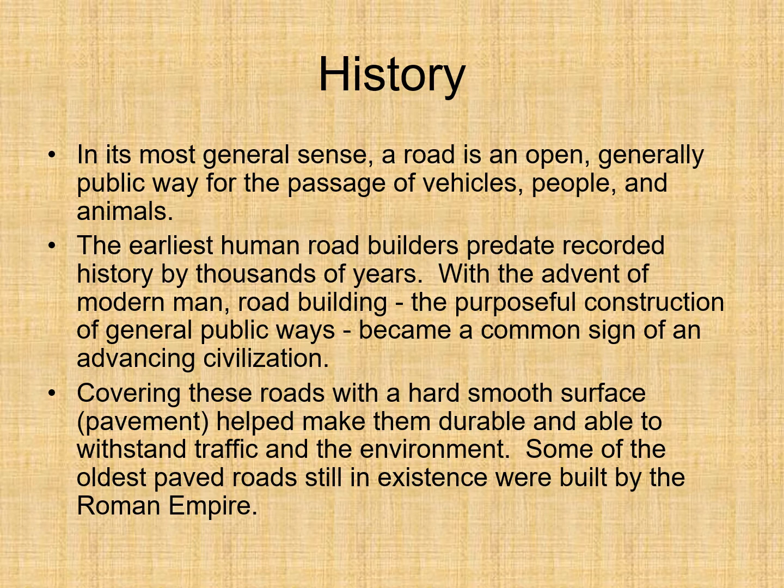So look at the Roman roads. This is the Roman road.

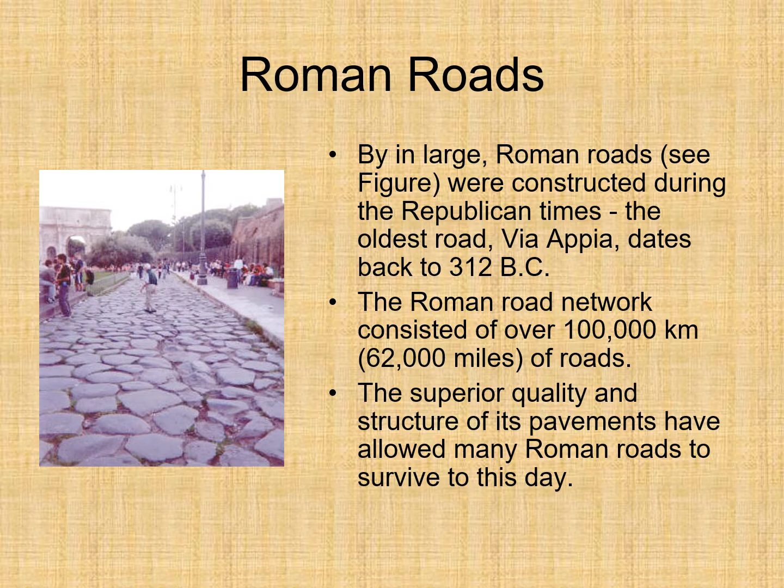By and large, Roman roads were constructed during the Republican times. The oldest road, Via Appia, dates back to 312 BC, before Christ. The Roman road network consisted of over 100,000 kilometers, or 62,000 miles, of roads. The superior quality and structure of its pavement have allowed many Roman roads to survive to this day.

So the topmost layer, that is the summa crusta, that is the surfacing, smooth polygonal blocks embedded in the underlying layer. Nucleus, a kind of base layer composed of gravel and sand with lime or cement.

Rudus, the third layer, was composed of rubble masonry and smaller stones also set in the lime mortar. Statumen, two or three courses of flat rubble stones set in lime mortar.

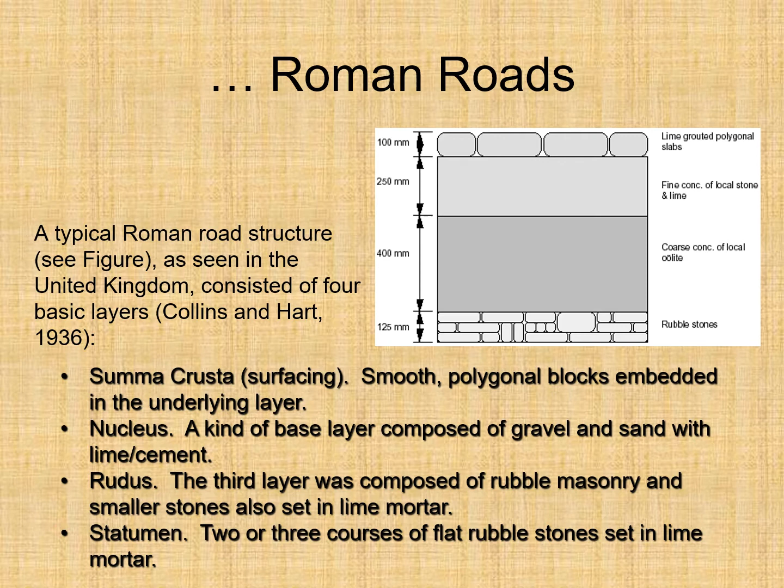Telford Pavements. The first insight into today's modern pavements can be seen in the pavements of Thomas Telford.

Telford served as a building mason and extended his masonry knowledge to bridge building. During lean times, he carved gravestones and other ornamental work. Eventually, Telford became the surveyor of public works for the county of Shropshire, thus turning his attention more to roads.

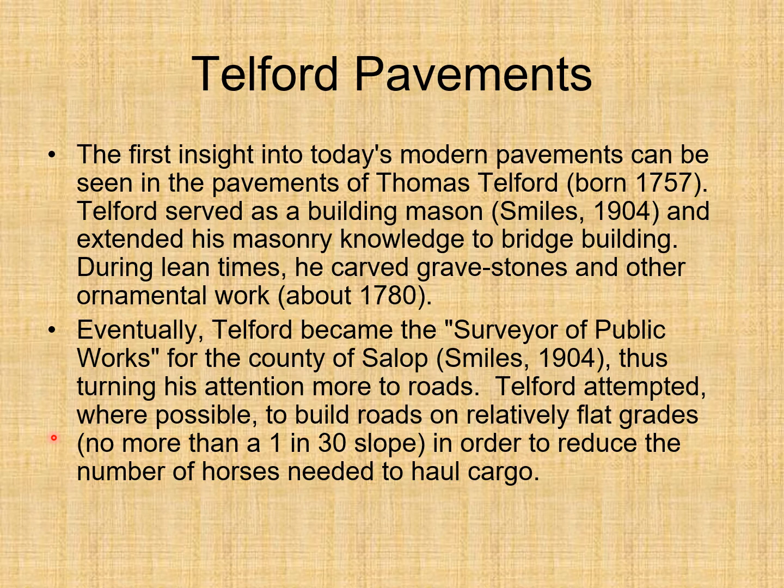Telford attempted, where possible, to build roads on relatively flat grades, no more than a 1 in 30 slope, in order to reduce the number of horses needed to haul cargo.

Telford's pavement section was about 350 to 450 mm, or 14 to 18 inches, in depth and generally specified 3 layers. The bottom layer was comprised of large stones, 100 mm or 4 inches wide and 75 to 180 mm, 3 to 7 inches, in depth.

It is this specific layer which makes the Telford design unique. On top of this were placed 2 layers of stones of 65 mm, or 2.5 inches, maximum size, about 150 to 250 mm, or 6 to 9 inches total thickness, followed by a wearing course of gravel about 40 mm.

1.6 inches thick. It was estimated that this system would support a load corresponding to about 88 Newton per millimeter, or 500 pounds per inch of width.

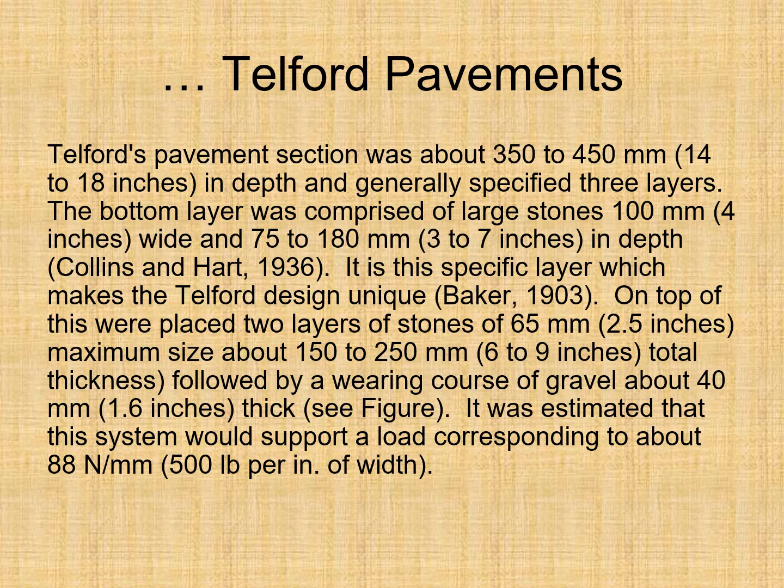So this is the typical cross section of the Telford pavement. These are the different layers that you can see.

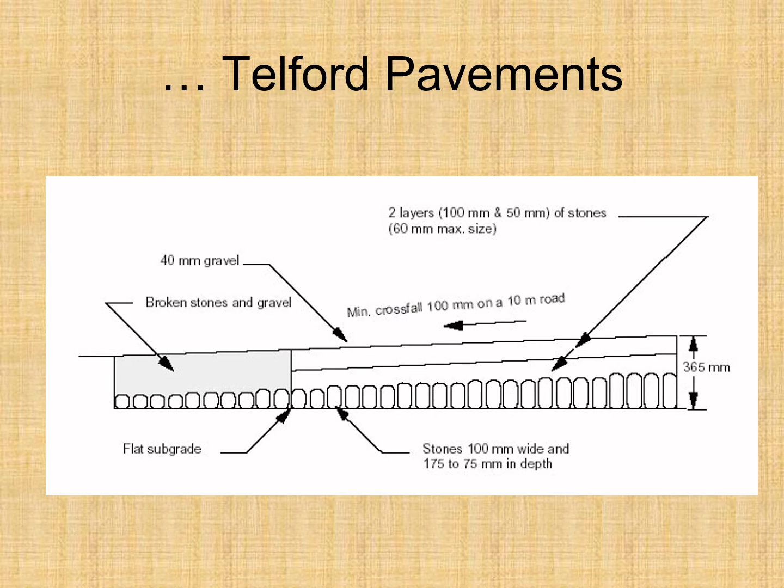Then comes the Macadam pavements. Macadam pavements introduced the use of angular aggregates. John Macadam observed that most of the paved United Kingdom roads in the early 1800s were composed of rounded gravel.

He knew that angular aggregate over a well-compacted subgrade would perform substantially better. He used a sloped subgrade surface to improve drainage, unlike Telford, who used a flat subgrade surface, on which he placed angular aggregate, hand broken with a maximum size of 75 mm or 3 inches, in 2 layers for a total depth of about 200 mm or 8 inches.

On top of this, the wearing course was placed, about 50 mm thick with a maximum aggregate size of 25 mm. Macadam's reason for this 1 inch maximum aggregate size was to provide a smooth ride for wagon wheels.

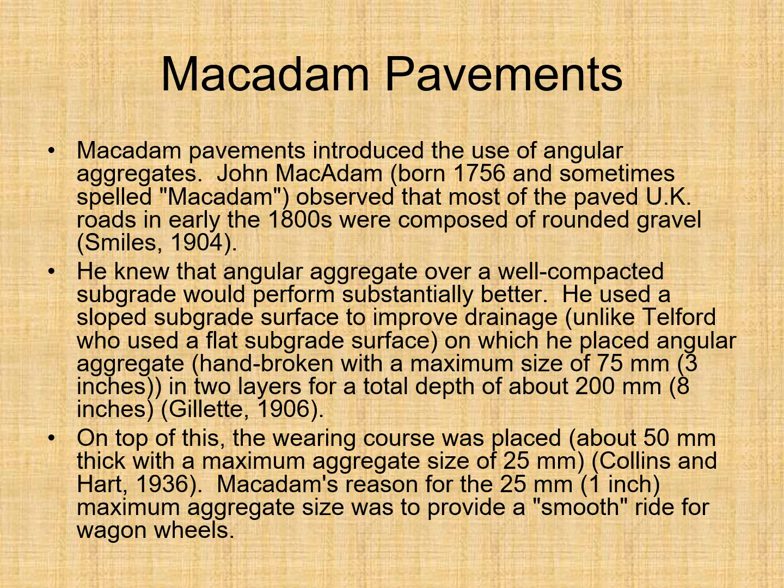The total depth of a typical macadam pavement was about 250 mm, that is 10 inches. Macadam was quoted as saying, 'No stone larger than will enter a man's mouth should go into a road.' The largest permissible load for this type of design has been estimated to be 158 Newton per millimeter, or 900 pounds per inch width.

In 1815, Macadam was appointed Surveyor General of the Bristol roads and was then able to use this design on numerous projects. It proved successful enough that the term macadamized became a term for this type of pavement design and construction. The term macadam is also used to indicate broken stone pavement.

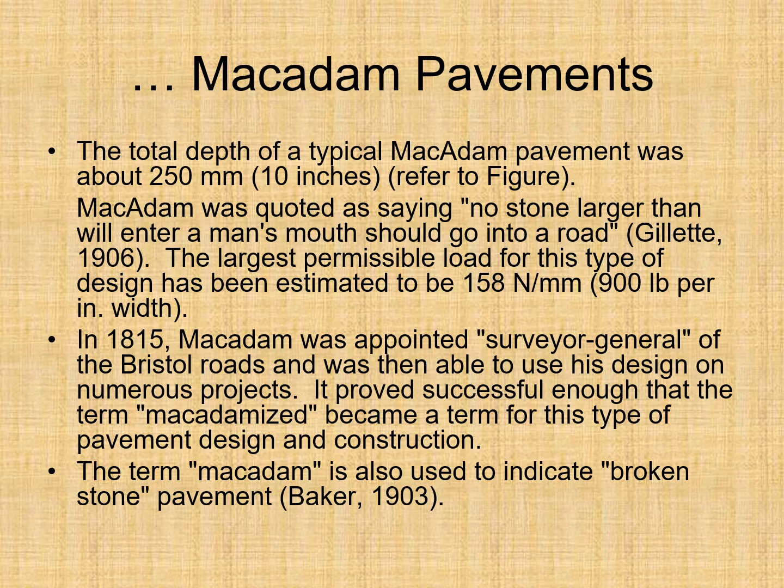So this is the cross section of the macadam pavement.

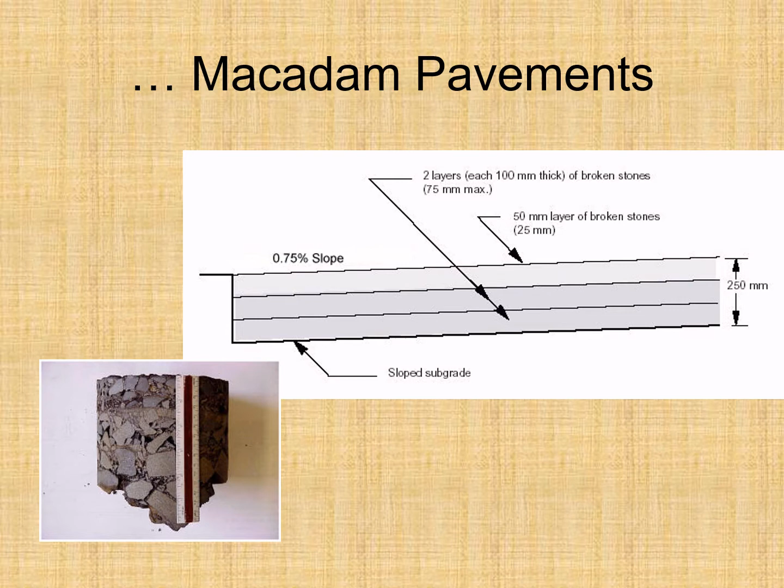Now we are having the modern highways like that.

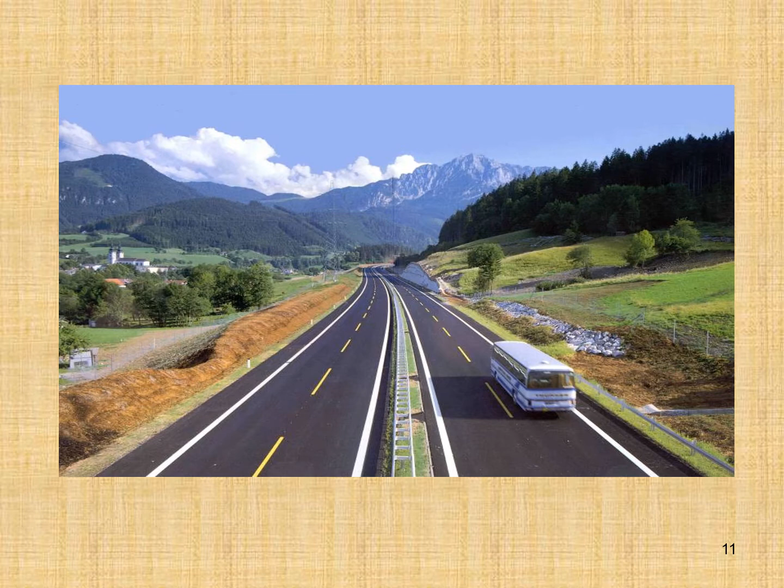Pavement overview. Typically pavements are built for 3 main purposes: load support, smoothness, and drainage. Load support means the pavement material is generally stiffer than the material upon which it is placed, thus it assists the in situ material in resisting loads without excessive deformation or cracking. Smoothness means pavement material can be placed and maintained much smoother than in situ material, which helps improve ride comfort and reduce vehicle operating costs. Drainage means pavement material and geometric design can affect quick and efficient drainage, thus eliminating moisture problems such as mud and ponding puddles.

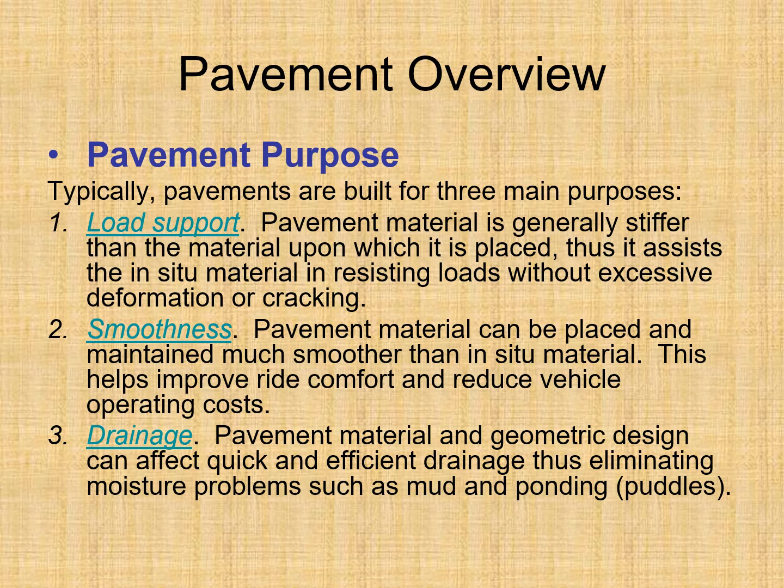So, what is a pavement? The answer is a multi-layer system that distributes the vehicular loads over a larger area. Here you can see the different layers of this road, and this is the wheel that is going to move on that particular road, and in this way we are having the distribution of this wheel load.

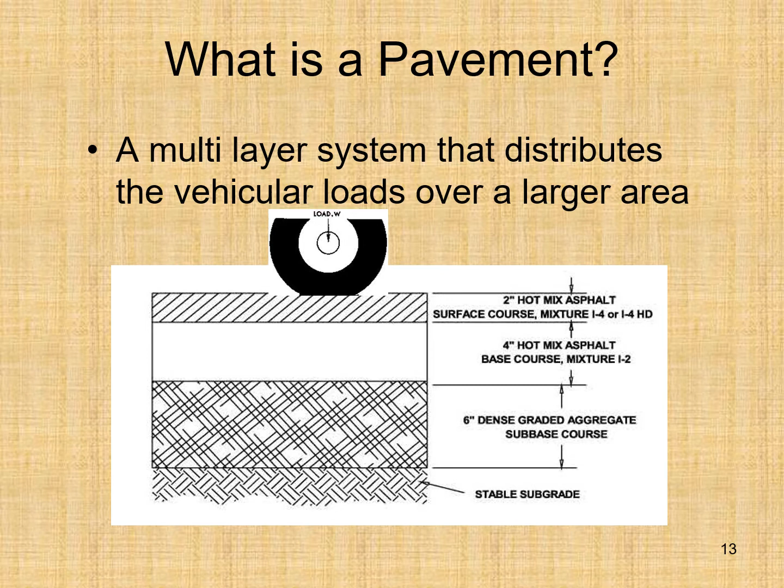Classification of pavements. By function, we have airport pavements, highway and freeway pavements, parking and street pavements. By structure, we have classes like rigid or concrete pavements, flexible pavements or asphalt concrete pavements, composite pavements, and gravel pavements, meaning unpaved pavements. Rigid pavement and flexible pavement we have already discussed, but composite pavement is new, and we will discuss this one in today's lecture.

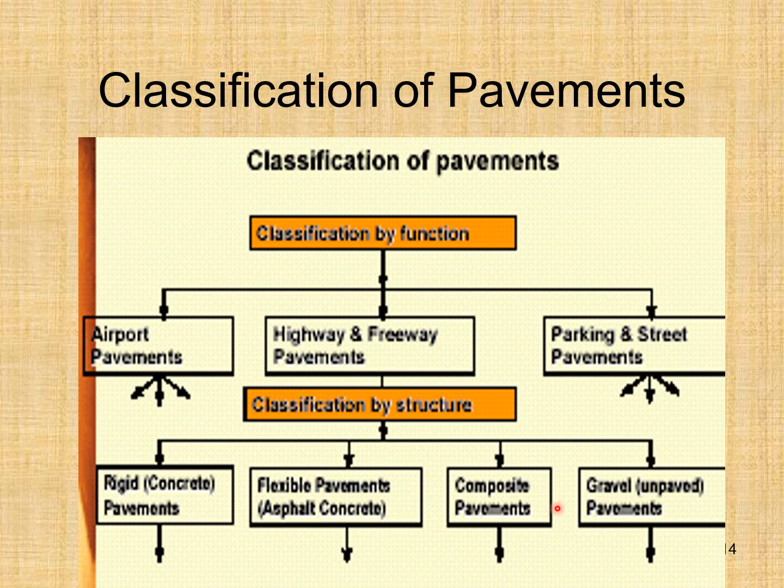Here you can see the flexible pavement and its conventional components. Upon subgrade we are having the subbase, upon that the base course, and this is the surfacing. This one is the binder course or intermediate course, and this is the wearing course. The prime coat of bitumen has been provided in between the binder course and the base course. Where I am moving this pointer, you can see the tack coat, which is provided to develop a bond between the wearing course and the binder course. At the top we have got the seal coat just to seal the surface of the wearing course. So these are the conventional components of flexible pavement shown in this diagram.

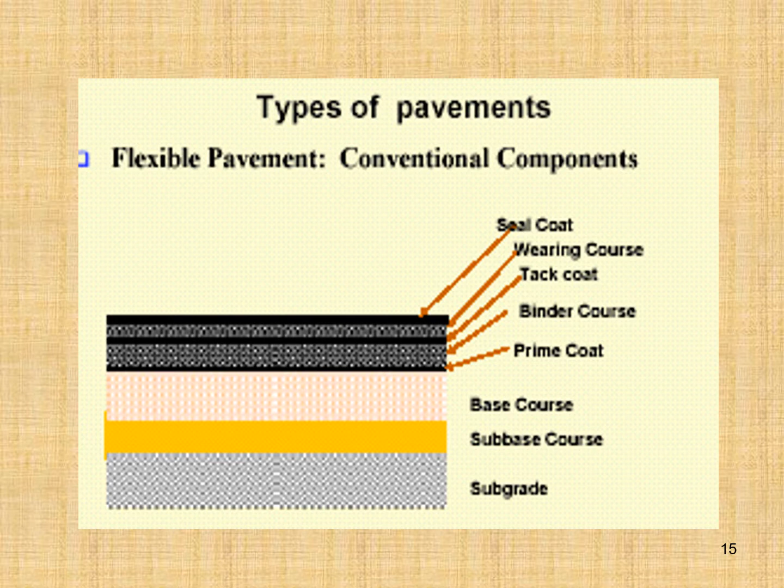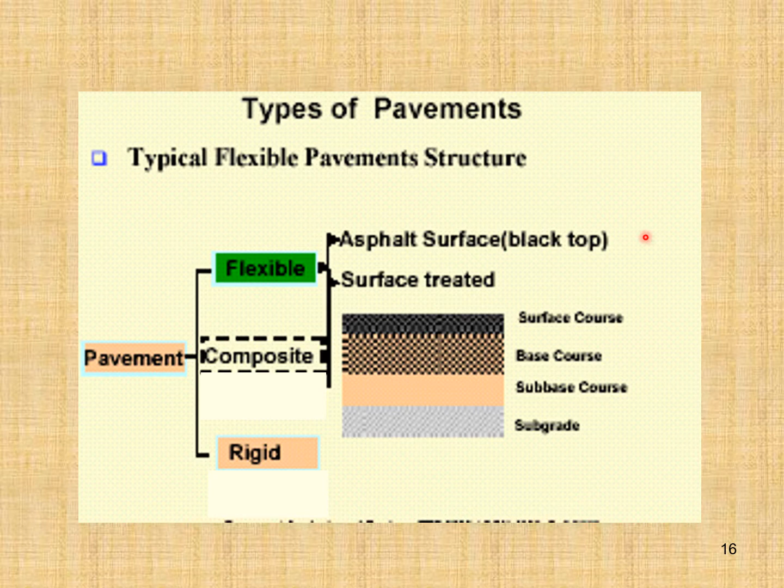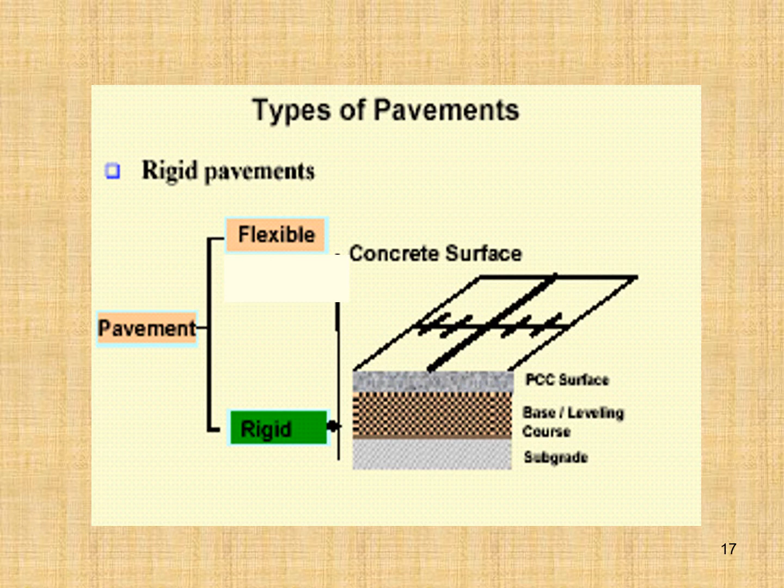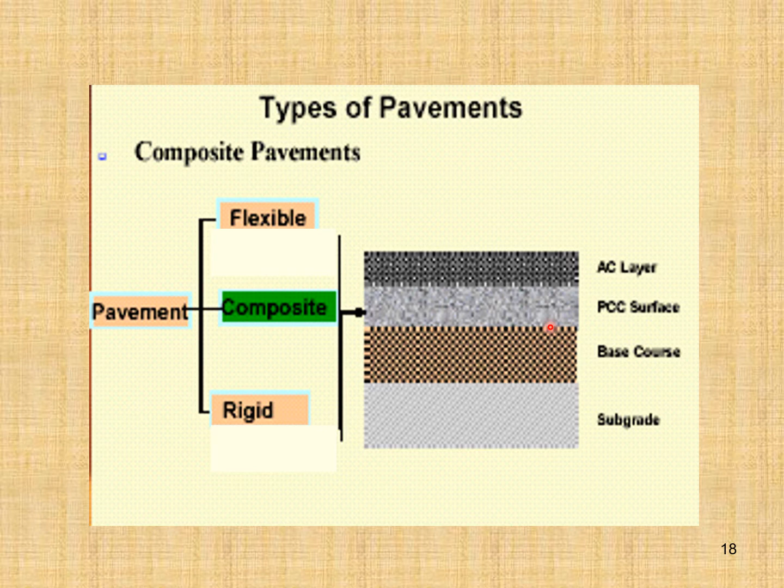And this is a composite pavement. In fact, you can say it is the combination of the flexible and the rigid pavement. In this particular case, you can see subgrade, base course, and the PCC surface. So up till now we are having the rigid pavement, and upon that you can see the asphalt concrete layer has been provided. So this structure is basically the composite pavement structure.

So composite pavements are of two types. Number one, the composite pavement black topping. Here the idea is that we are having the rigid pavement, and upon that we have provided the leveling course, and above the leveling course we have just provided the asphalt concrete overlay. So this is the composite pavement, or simply the black topping pavement, because if you look at the color of asphalt, it is very dark brown to black color, so that's why it is called black topping.

On the other hand, the second type of composite pavement is the white topping. So originally we had the flexible pavement over here. At the top of that we provided the leveling course, and then the PCC overlay has been provided. If you look at the color of the concrete, it is very light, so in that context, the word white is being used, the white topping pavement.

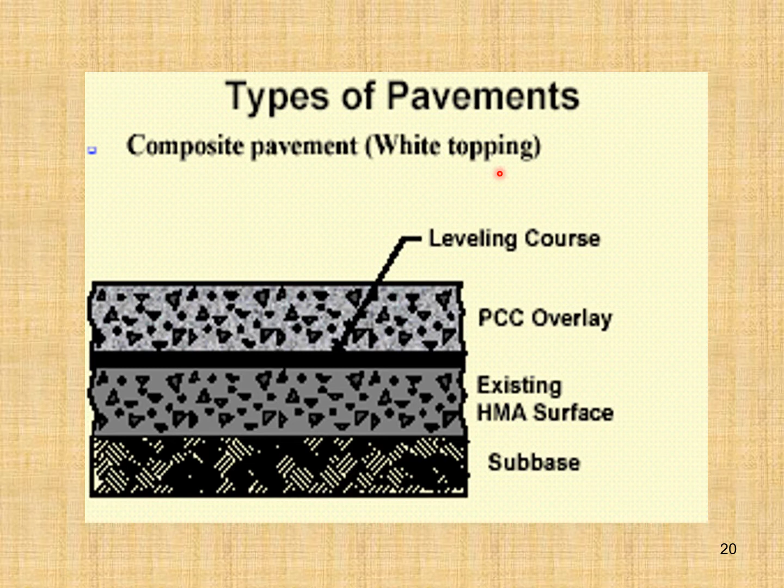Hot mix asphalt types. There are many different types of flexible pavements. This section covers three of the more common hot mix asphalt mix types: dense graded HMA, stone matrix asphalt SMA, and open graded HMA.

First, look at dense graded HMA. Flexible pavement information in this guide is generally concerned with dense graded HMA, a versatile all-around mix, making it the most common and well understood mix type in the US. It is a well graded HMA mixture intended for general use, and when properly designed and constructed, it is relatively impermeable.

Next, stone matrix asphalt, or SMA. Although relatively new in the US, it has been used in Europe as a surface course for years to support heavy traffic loads and resist studded tire wear. SMA is a gap graded HMA designed to maximize deformation or rutting resistance and durability.

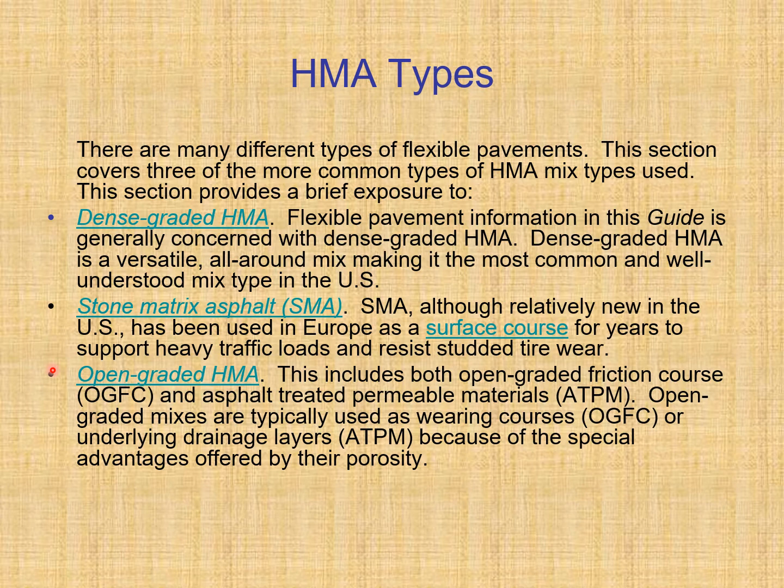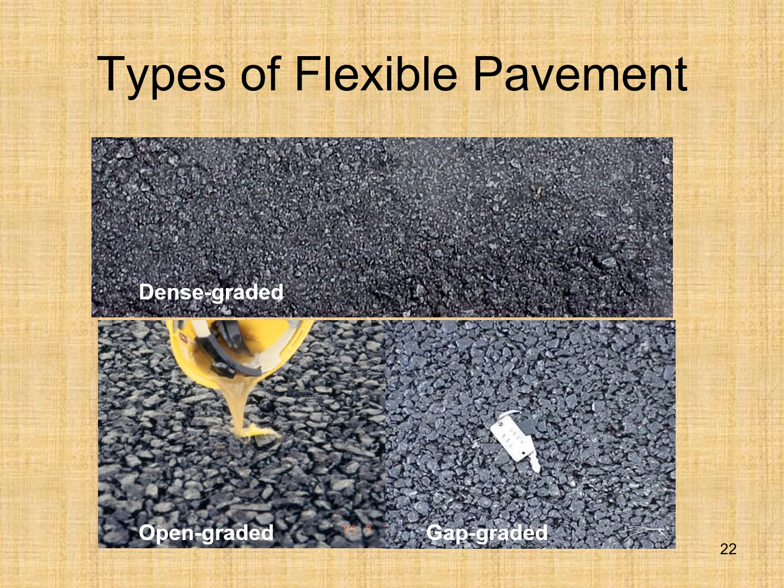This slide is meant for stone matrix asphalt, and you can see the contact between the particles or stones here—stone on stone contact—which will greatly reduce the rutting in the pavement.

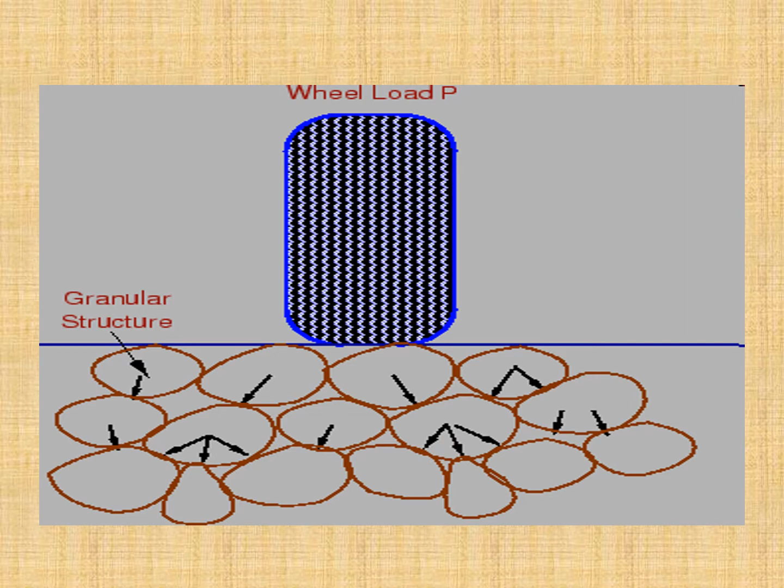One more thing you can see is that the area over which load is spreading depends on the stiffness of the layer. Higher the stiffness, more will be the area of spread. You can see this even on the next slide.

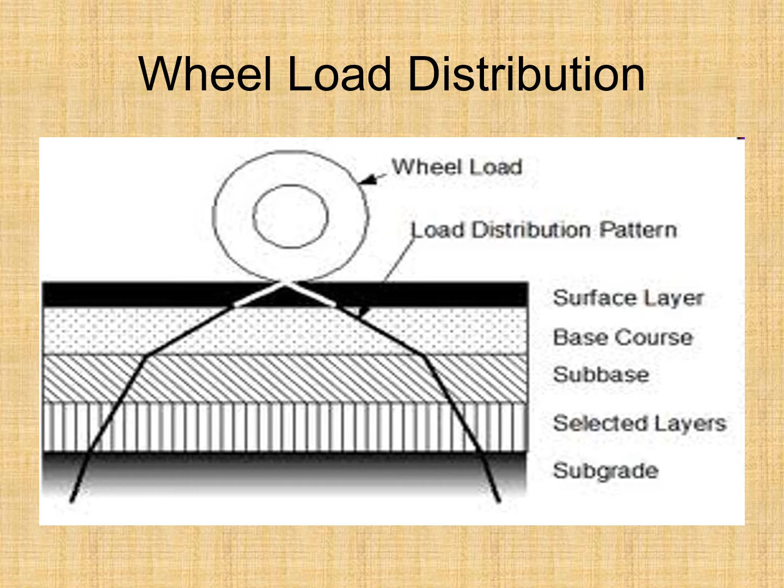If you look at this slide: this is surfacing, this is base course, this is sub-base, and this is subgrade. Look at that—the maximum spread is in the surfacing material, and the stiffness of this material is maximum. In other words, the surfacing material, the asphalt concrete, is superior to base, base is superior to sub-base, and sub-base is superior to subgrade. Now look at the wheel load distribution pattern.

So what is happening to the angles? There are two ways to understand this. Look at angle theta 1, theta 2 and theta 3—these are the angles with vertical. Theta 1 is the maximum one, so theta 1 is greater than theta 2, and theta 2 is greater than theta 3. This is because the stiffness or modulus of elasticity of this material is maximum.

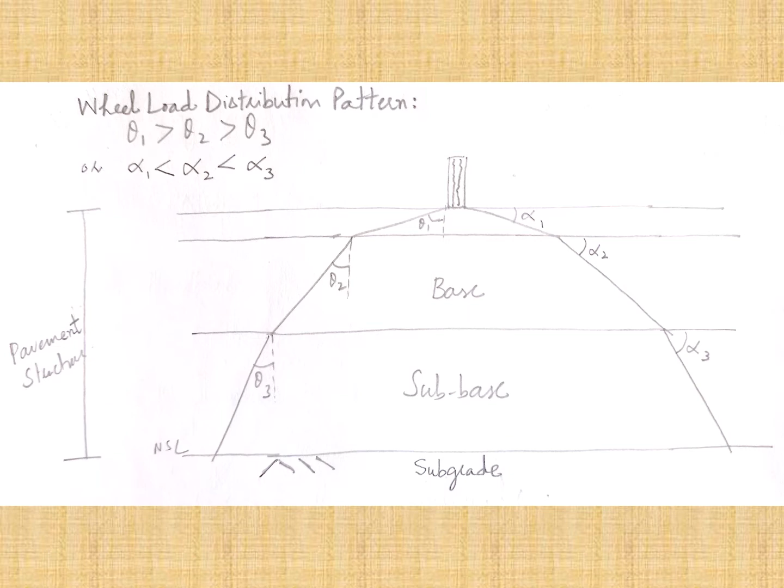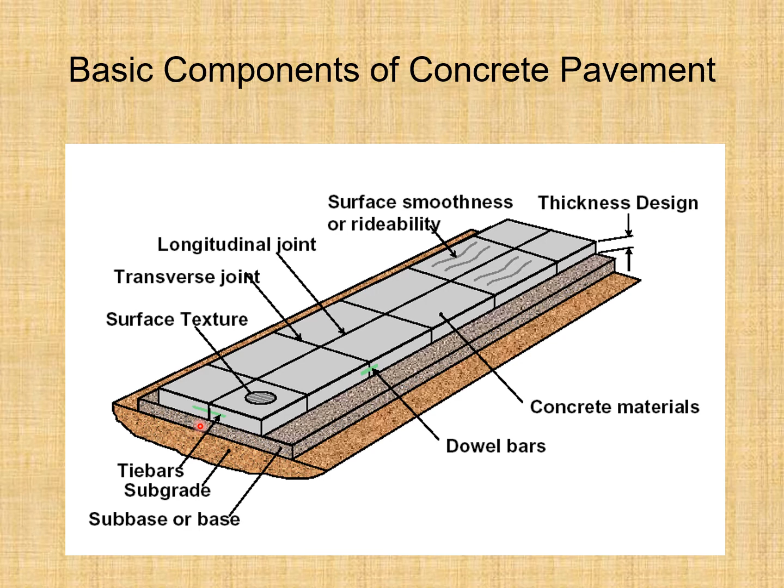Here you can see the basic components of concrete pavement. Joints are to be provided: this is the longitudinal joint, and we are having the transverse joints as well. At the transverse joints, small dowel bars will be provided, and along the longitudinal joint, tie bars will be provided.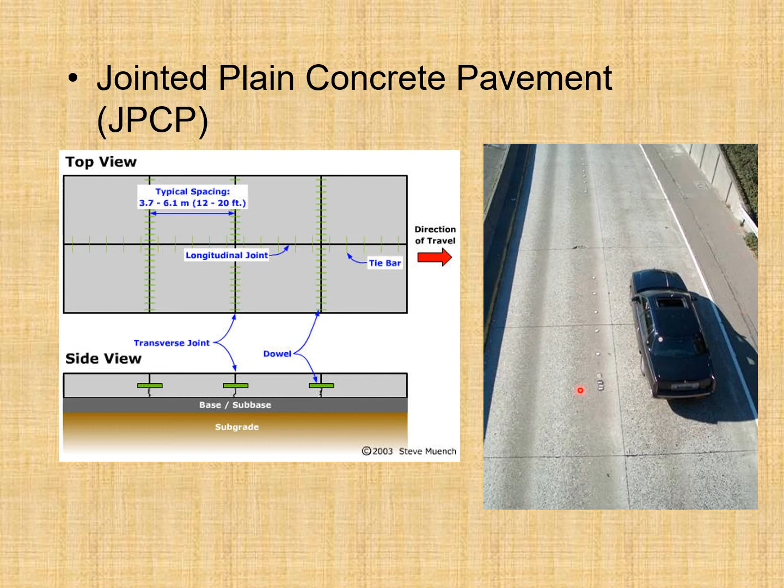Here you can see the jointed plain concrete pavement. We are having plain concrete, but steel has been provided only at the joints. This is the top view, and this is the side view.

If you just look at this one, jointed CC pavement - in this case, the temperature steel has been provided in the slab of the concrete.

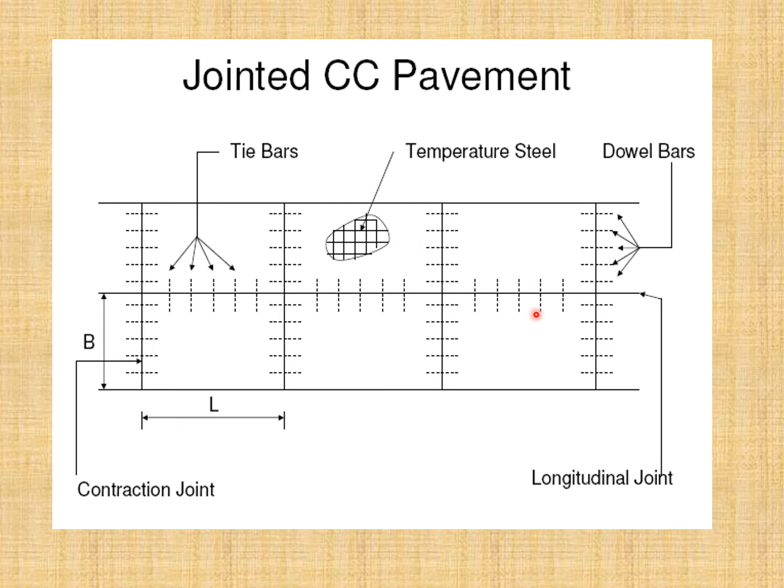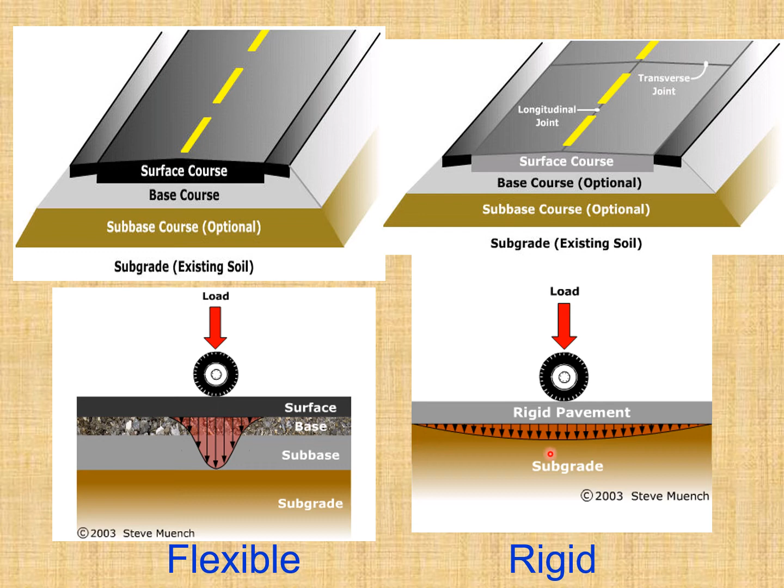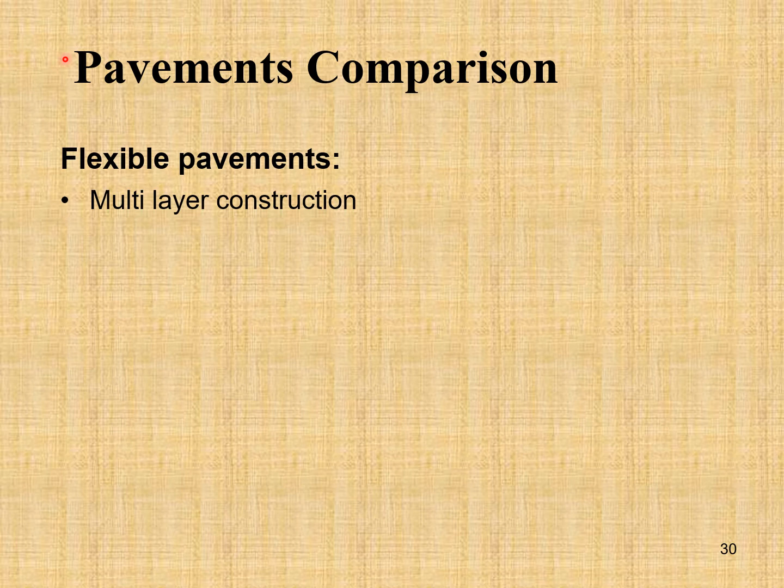Pavement comparison. For flexible pavements, multi-layer construction is involved, with energy consumption due to transportation of materials, and increasing cost of asphalt due to high oil prices.

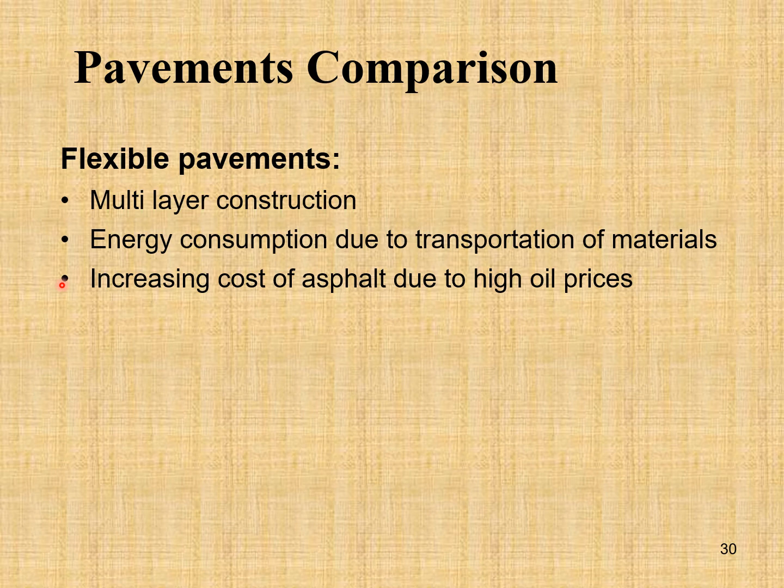Rigid pavements generally have a single layer structure in the form of a concrete slab, and generally last longer, but may require asphalt topping due to noise or comfort issues.

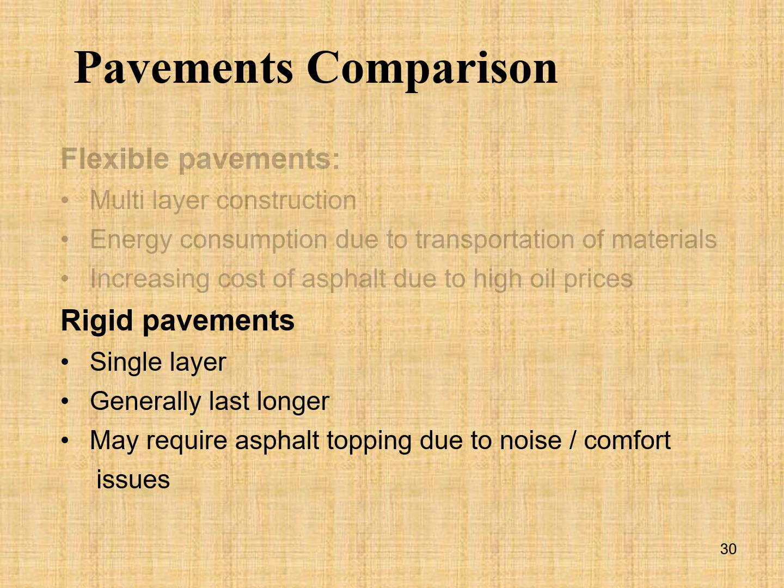Heavy vehicles consume less fuel on rigid pavements. This is because in the case of flexible pavements, some deformation occurs due to the heavy vehicle, but here, because of more rigidity, the vehicles can be operated without any problem. That's why fuel consumption is less in the case of rigid pavement.

Rigid pavements are more economical when considering environmental or life cycle costing. The initial cost of rigid pavement is very high, but if you consider the environmental or life cycle costing, then you can say that rigid pavements are more economical.

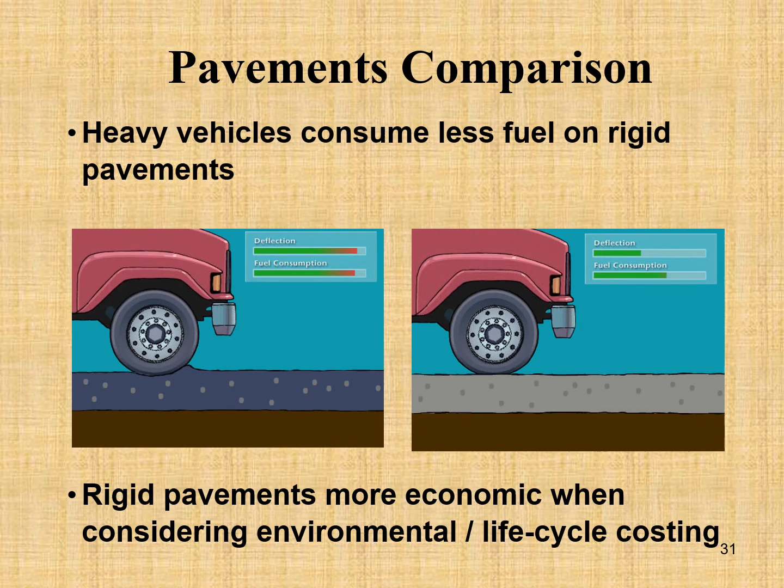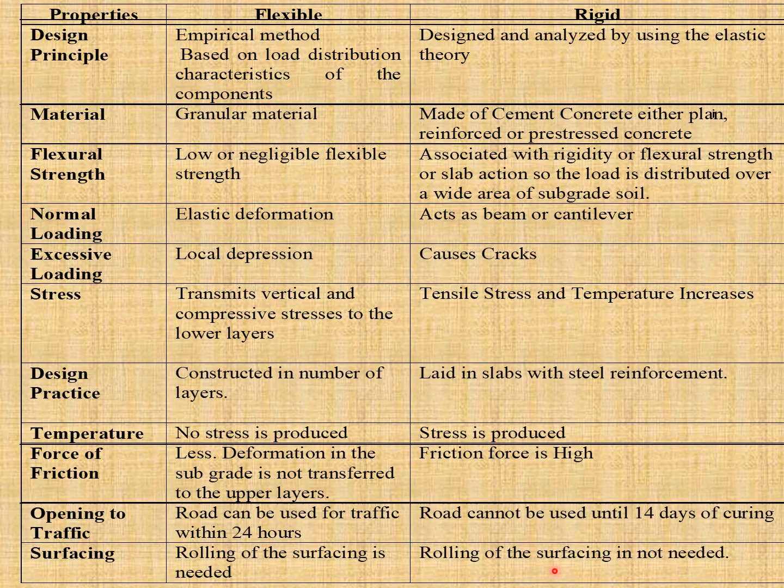Now you can see the cut and fill sections. This pavement shows a typical cut section, because you can see the original ground surface, but actually the pavement has been constructed in this fashion. This is the top of the pavement.

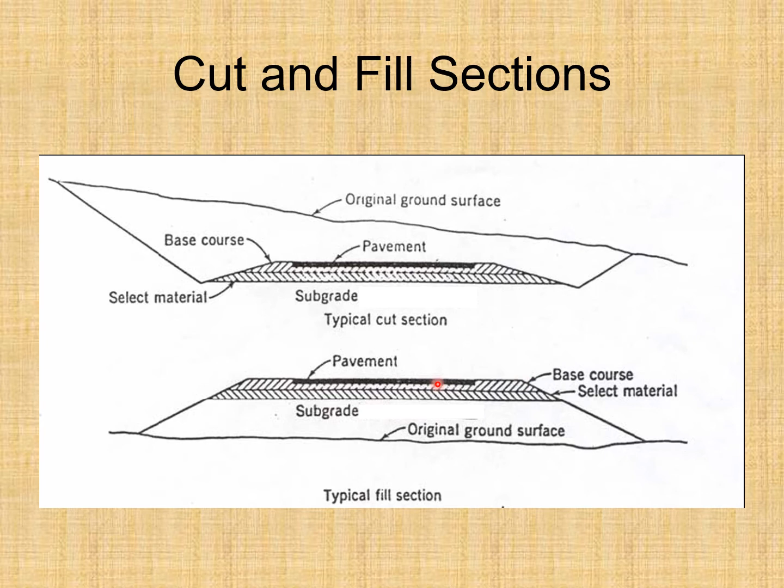And here, look at this one, a typical fill section. The original ground surface was this one, and by constructing an embankment, and then the different layers of the pavement have been provided, this is now the top of the pavement. So this is a typical fill section.

And if you just look at this one, this is the typical road section, cut and fill. This was the original ground level, and you can see this part is in cut and this part is in fill.

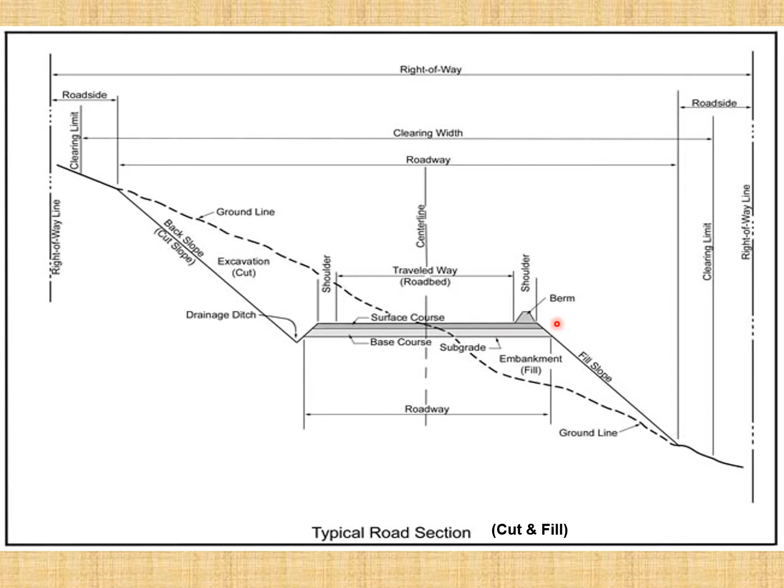So pavement responses under loads. When the wheel load is there, you get deformation like this, and you would see compressive stresses here, and at the bottom of the surfacing we have tensile stresses. Then the deformation proceeds to the underlying layers of the base and subbase, and ultimately the load is transferred to the subgrade soil.

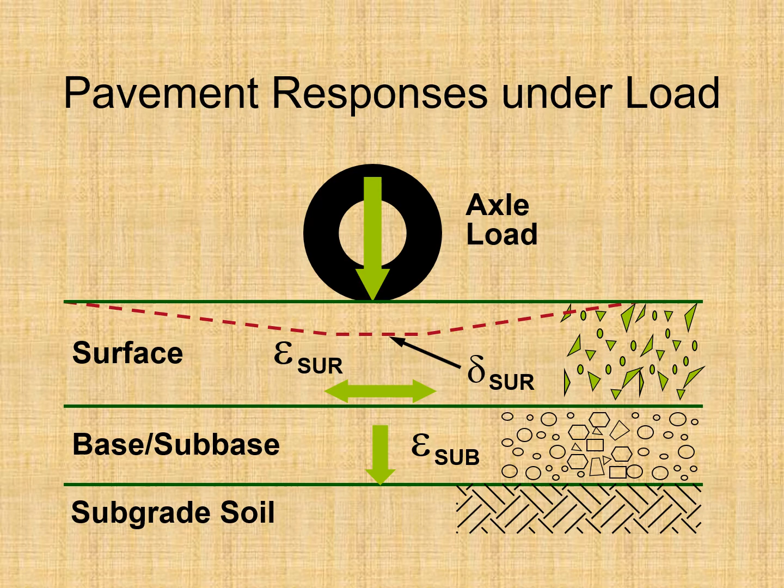Three reasons for pavement failures. Number one, deformation or rutting at high temperature as asphalt softens. Number two, fatigue resulting in cracking due to high loads or aging. Number three, low temperature cracks as asphalt becomes brittle and shrinks in cold weather.

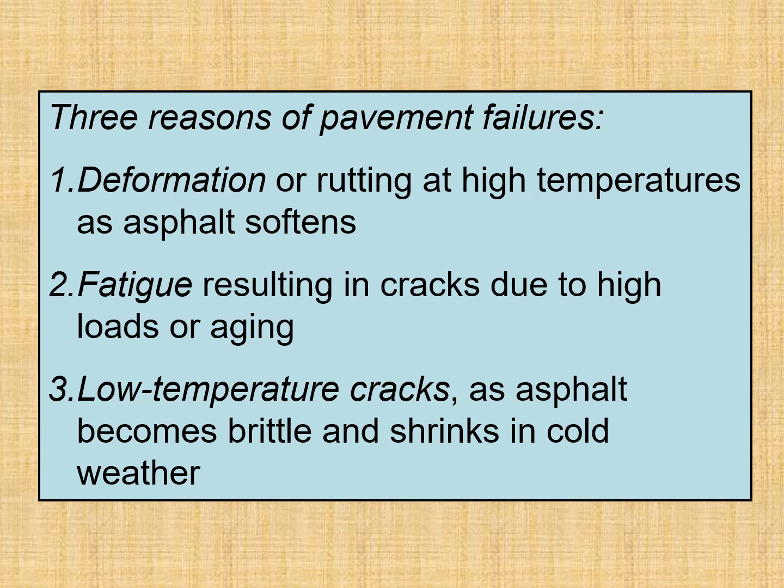Asphalt cement is held together by aggregate interlock or internal friction. Here you can see the structure of the asphalt concrete. Gravel has very little internal friction and interlocking, while crushed stone has high interlocking friction. Particles should always be at the surface to provide traction when the surface is wet. Too much asphalt results in segregation of the asphalt and aggregate, called bleeding or flushing.

Now some points are given in this block. Air pockets account for 2 to 6% of the volume. Aggregates constitute 70 to 75% by volume, or 90 to 95% by weight. Excessive amounts of binding material tend to lubricate the particles and lower the stability of the pavement.

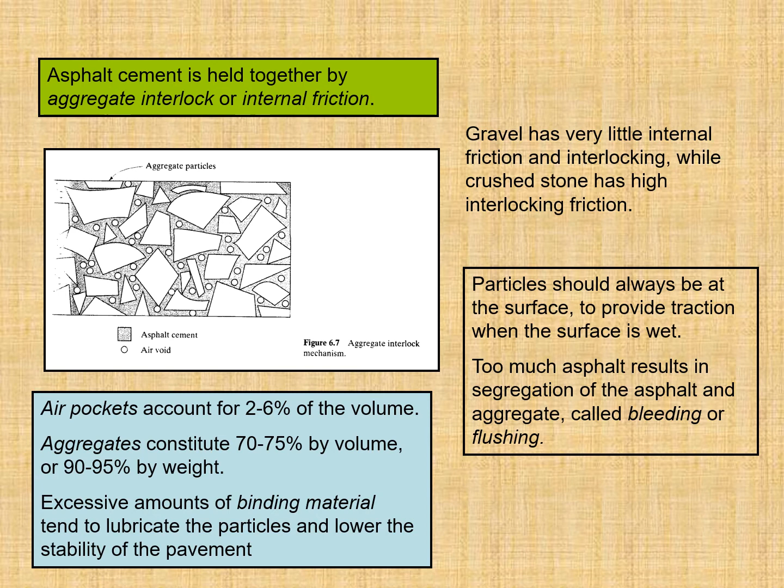Well, if you just look at the aggregate grading, first look at the open graded aggregate. Open graded aggregate contains little or no fine aggregate. It has relatively large void space and is good for roads requiring high permeability. So we can say that open graded HMA mixture is designed to be water permeable.

Open graded mixes use only crushed stone and a small percentage of sands. There are two types of open graded HMA mixture: open graded friction course, that is OGFC, and asphalt treated permeable base, that is ATPB.

As far as the dense graded mix is concerned, dense graded mix is a well graded HMA mixture for general use. They can be further classified as either fine graded or coarse graded, or even there is a third category, that is intermediate graded.

In the case of dense graded aggregate, when we say it is coarse graded, it means coarse aggregate is dominant. In intermediate graded, more sand is present than coarse aggregate. In the case of fine graded, there is more fines and sand than coarse aggregate. So in this way there are different categories of dense graded aggregate.

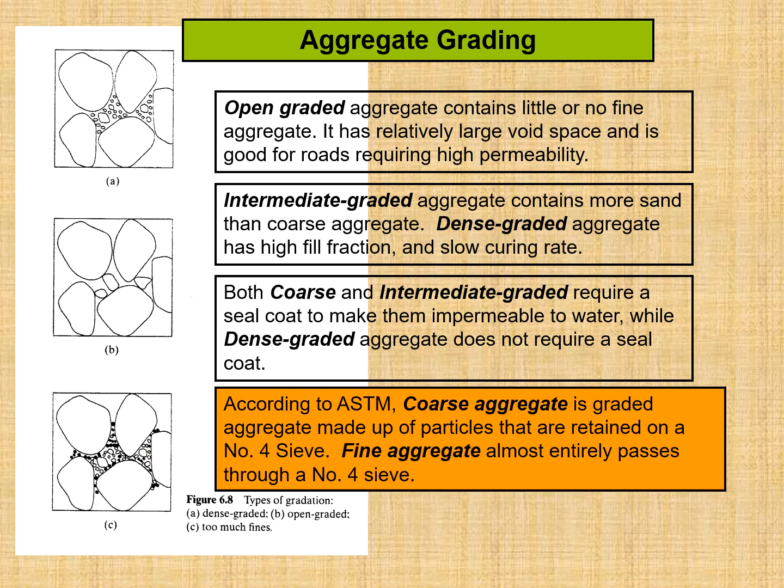There are two types of asphalt concrete: hot mix, hot laid mixes (HMA), and cold mixed, cold laid bituminous mixtures. Hot mixed asphalt cement is aggregate mixed with asphalt cement, tar or emulsified asphalt, and must be heated to about 300 Fahrenheit prior to mixing. Cold mixed asphalt is aggregate mixed with emulsified asphalt, cutback asphalt or tar, applied at ambient temperature.

Some characteristics of hot mix and cold mix asphalt: hot mix asphalt is durable, resistant to rutting, can sustain high loads and wider temperature ranges. Cold mixed asphalt is made for lighter use, cheaper to apply, and good for road repairs and resurfacing.

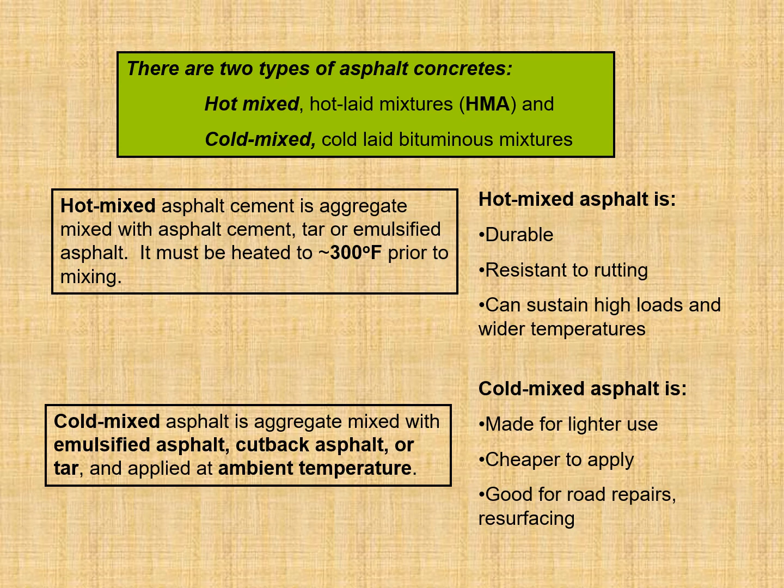Asphalt pavement is flexible, requires less preparation than concrete pavement, and can be repaired quickly. It also requires a higher amount of maintenance, periodic surface treatment, and becomes hard and brittle with age and under load.

The subgrade acts as the foundation and may be stabilized if required. The subbase is made of aggregate, sometimes mixed with lime. The base course supports the wearing surface and may be made of asphalt or untreated aggregate such as crushed stone, gravel, sand or cement. The surface course is the finished asphalt concrete, sometimes topped with a sealant.

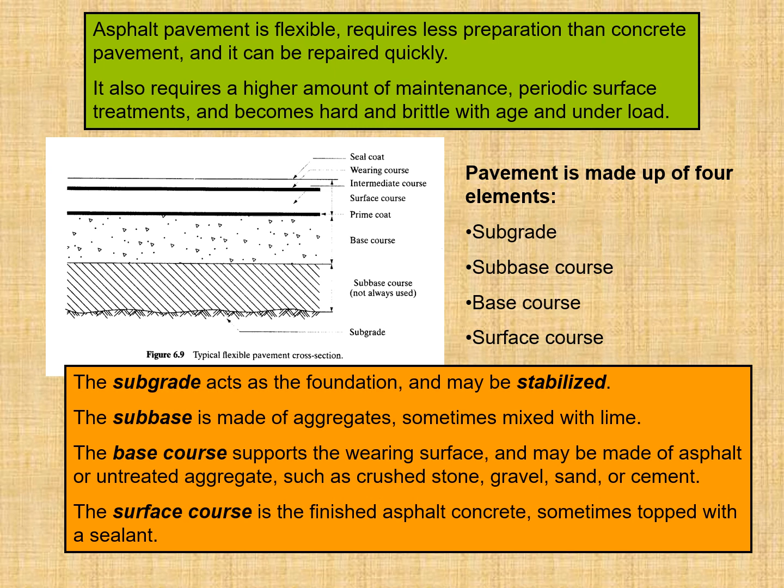Now look at the various spray applications to pavement, including seal coats: sprayed asphalt followed by application of stone or gravel cover. The largest aggregate is never more than twice the size of the smallest.

Fog seal is a light application of slow setting emulsified asphalt with or without aggregates. A prime coat is liquid asphalt applied to an untreated foundation layer or subgrade of stabilized soil, gravel or water-bound macadam.

A tack coat is a thin coat of bituminous material applied to an existing surface to provide bond between the new construction and the existing surface. A slurry seal is a mixture of slow-setting emulsified asphalt, fine aggregate, mineral filler, and water applied to the pavement without heat.

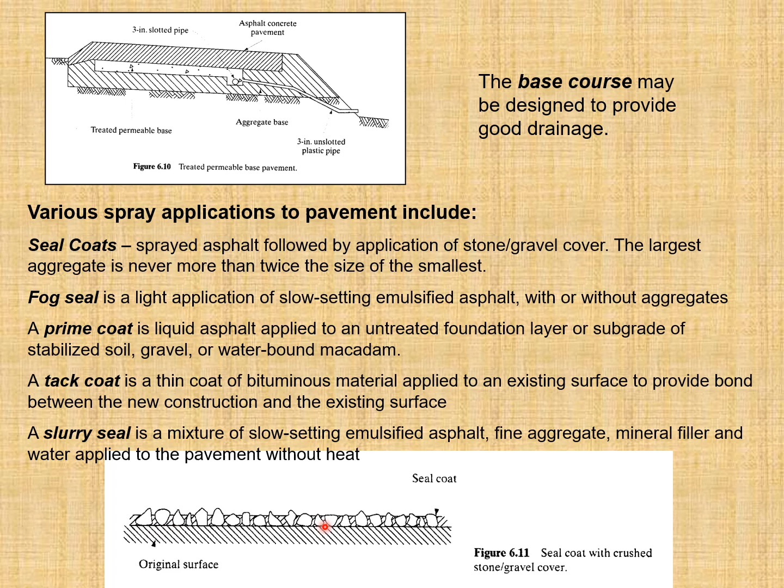Perpetual pavement is a term used to describe a long-lasting structural design, construction, and maintenance concept. A perpetual pavement can last 50 years or more if properly maintained and rehabilitated.

As Michael Nunn pointed out in 1998, flexible pavements over a minimum strength are not likely to exhibit structural damage even when subjected to very high traffic flows over long periods of time. He noted that existing pavements over about 370 mm, or 14.5 inches, should be able to withstand an almost infinite number of axle loads without structural deterioration due to either fatigue cracking or rutting of the subgrade.

Deterioration in these thick, strong pavements was observed to initiate in the pavement surface as either top-down cracking or rutting. Further, Uhlmeyer et al. in 2000 found that most HMA pavements thicker than about 160 mm, that is 6.3 inches, exhibit only surface-initiated top-down cracking.

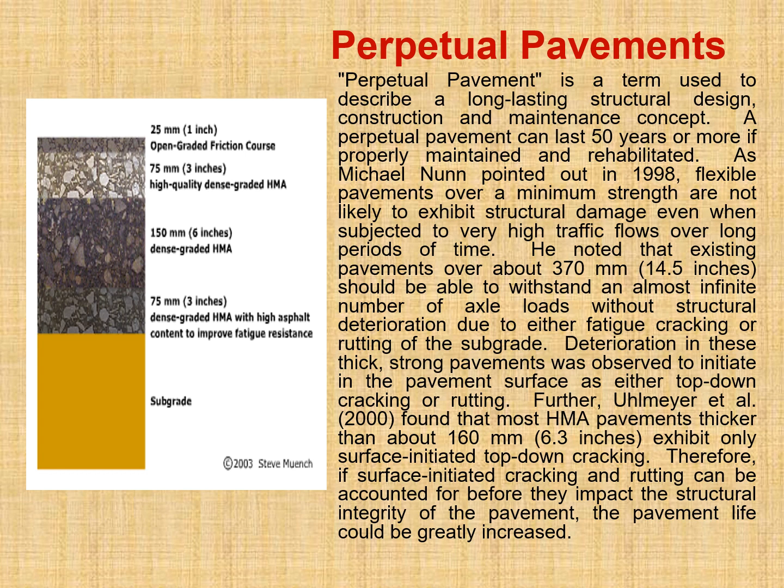Therefore, if surface-initiated cracking and rutting can be accounted for before they impact the structural integrity of the pavement, life could be greatly increased. Thank you.